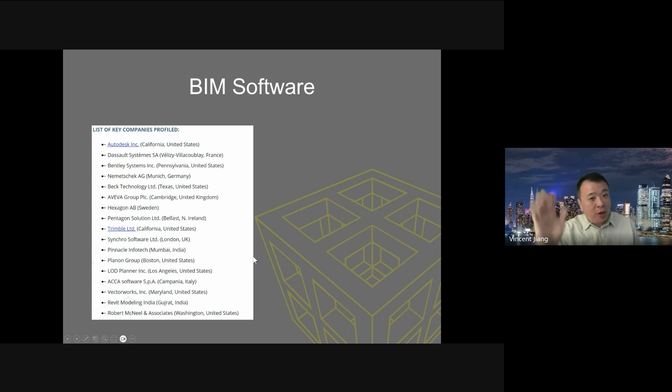Case study. Today I'm going to talk about a project I have been involved in for the past 3 years. This is not the first 4D model I've been involved in, but it's definitely one of the most interesting ones, which is still ongoing.

Let's talk a little bit about this Van Wyck Expressway project. Location of the project, let's take a look at it.

Scope of work. There are 4 different scopes of work on this job. I'm going to show you the rendering so you guys have a better idea, because we are replacing basically 3 different sections of bridges, and 2 of them actually have a live track on them. We're also changing the settings on the northbound and southbound service road.

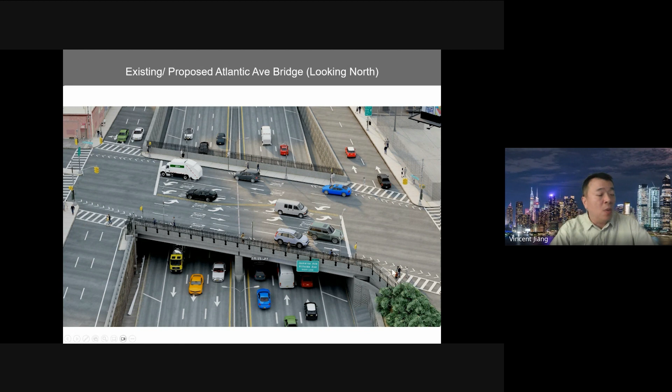This is how it's going to look—new retaining wall, new bridge, since the structure has rusted. Then the new pier, new retaining wall, new sidewalk, and especially here—this is near one of the busiest hospitals in Queens, Jamaica Hospital.

And this is all going to be replaced. The track, the ballast, and the waterproofing, everything, even the structure down underneath here, all new piers, all going to be replaced. Let's look at it.

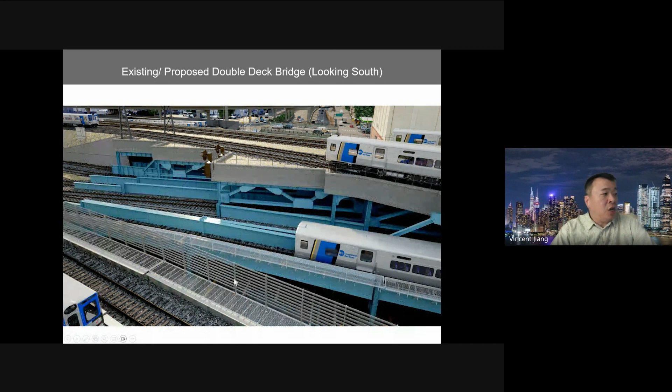This is how it's going to look with a new structure. Every pier is going to be replaced. Altogether, for the double deck, we have 3 different piers, plus 2 on the abutment. That makes it 5.

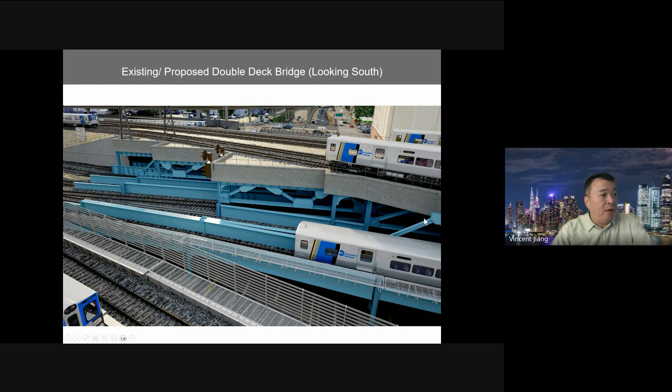Let's look at another one, which is very interesting. We'll call it Mainline 1 & 3. That's a different track from Jamaica, heading to Manhattan. This is how it looks, driving from Queens direction, from North Queens to South Queens. This is what you see.

You're going to see that overbridge right in front of you. This is what we call Mainline 1 & 3. The construction for that will require 2 super weekends to replace the whole structure. We have that assembled on the side, but this pier has all got to be built with temporary support on that.

The new pier, they're going to be sitting on the new pier, 15, 16, and 14 on that. So let's look at how it's going to look when it's complete. Brand new structure, and these piers are apparently so much thicker.

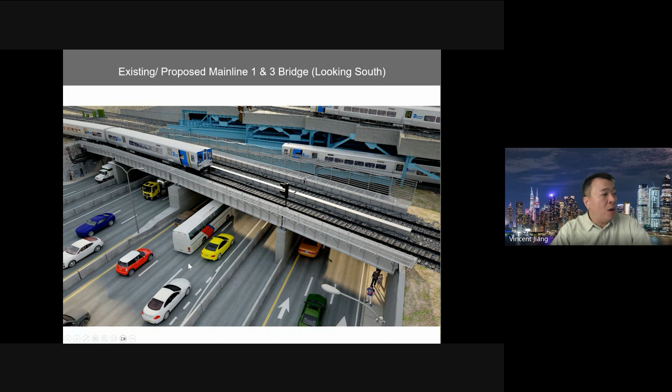And we get rid of the steel structure in the old ones. Actually, we got more space on the side road, on the service road, and a brand new retaining wall on that.

The last one we're going to see is the service road. This is how it looks for the service road. We actually have different elevations on the main road versus the service road. After it's all complete, this Mainline 1 & 3 and double deck are going to look brand new.

All this is because we can't take down the whole space. Nobody can go to the airport. So we only have 2 super weekends to shut down each side, northbound and southbound. The job's got to keep going. I'll show you guys a video of how this is done at the end of the presentation.

So how do we do everything? It's got to come out with the how do we start for this concept, and how do we make the CPM into real life during construction and before bidding.

During the bidding, we got all the bidding drawings since this is a design build. So we only get the concept, we only get a scope. We have to come out with the detail. So the bidding schedule actually involves a lot.

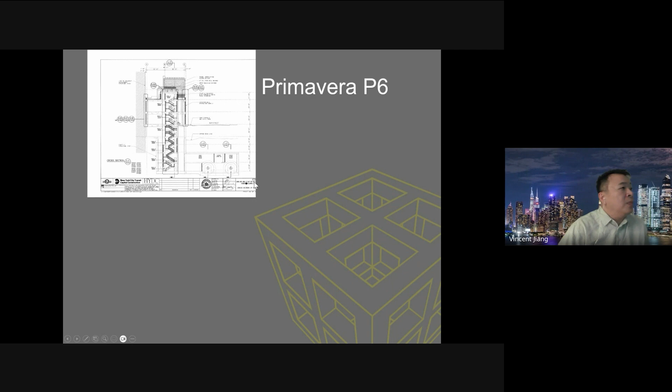So this is another project I had back about 15 years ago, where the 7 line extension goes from Times Square all the way to the new Hudson Yards with 2 new stations. That was one of the ventilation towers we have - about 150 feet deep, with 2 tunnels to a ventilation tower. So this is what we look like on the baseline.

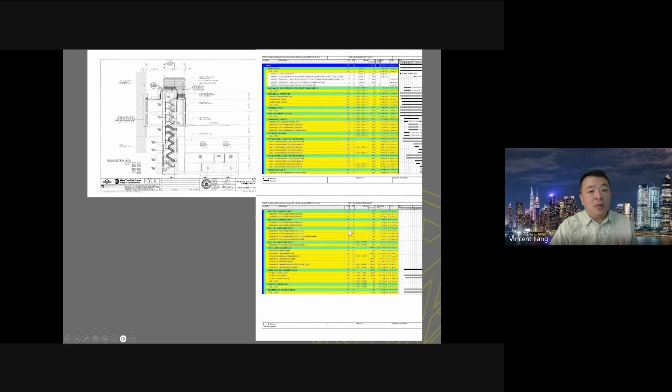This job was finished on time for 2 years, but unfortunately we lost a big part of money on that because the bidding wasn't accurate - they were missing a part of it. But because this job was running on time, we would have could have lost even more money on that.

So now a little demonstration about how we look at the P6 to do the payment. The payment for this job is basically broken down into the budget cost, and we have the actual cost and remaining costs on that.

So they are all coming from a category, what we call the WBS, work breakdown structure, which is the same as your DCB, detailed cost breakdown. Once you finish that, you can see the percentage on the total duration and remaining duration - that's how we get the percentage for the owner to pay on the category.

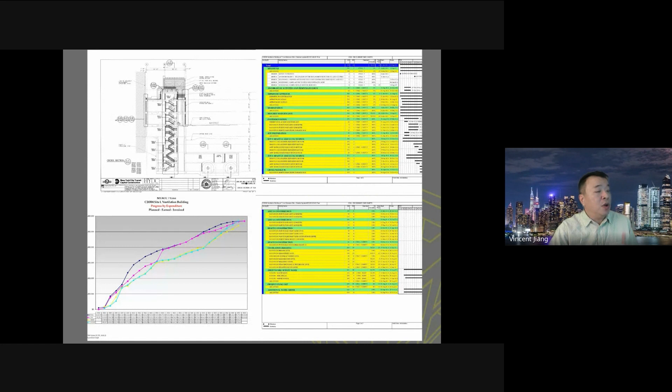So now, once you have the CPM, you can link that. How do we make the CPM update, and how do we do the monthly update on the payment? I'll just show you the CPM update, how I do it. Every month we get the progress and put it in the CPM - that's step 1. Step 2, we use the CPM to get paid from the Excel file, which is automatically generated for the Excel.

So when we finish, the DOT traditional, they have different pay categories. So when we finish one category, we can get a percentage completion, which is derived from the CPM. That's how we judge it, 50%, and go back to the bigger pay items for the payment.

And then after that, we do a Bentley meeting for that. So today I'm going to show you a little video clip. I hope you guys can see this. Not this one. This is during the meeting, we have the 4D model online. Can you see this one? No? All right, that is very unfortunate.

And then I will provide that video afterwards, but I'll show you some other video after that. So after we do that, we have the 4D/5D model by Bentley on a monthly schedule. I was trying to show you an overview, but unfortunately it's just not showing.

I'm sorry, I'm very low tech.